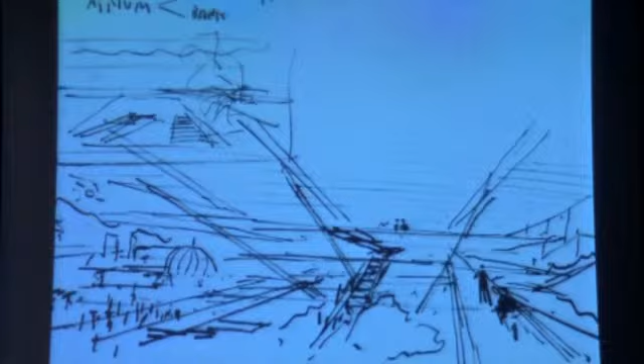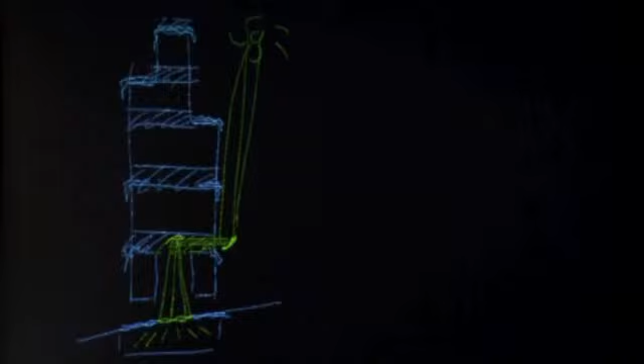It floats above. If you look at some of the early sketches here where I was indicating the possibility of gliding upwards through a kind of glass underbelly to the banking hall so that the ground would be free for pedestrians. This is an early diagram showing how that building is lifted up and sunlight is reflected down onto the space below. And this is the glass underbelly of the banking hall.

What is interesting is that every Sunday, if you looked through that glass floor onto the public space below, this is what you would see: an extraordinary colonization. This space is taken over by the Philippine community, by the ladies who serve the families in Hong Kong, who are highly articulate, intelligent. They're mostly university graduates. They move to Hong Kong because the standard of living is higher and they can send their savings back to the families in the Philippines.

And every Sunday, they celebrate, in a way, their national identity. What is interesting is there is a kind of self-ordering here, the sort of ordering that you will find in a favela, so that when a favela is eventually, in some instances, transformed into a permanent settlement, then there are certain grid lines, certain geometries, certain orders. So that transformed favela doesn't look any more like a favela. There is a very interesting kind of hidden order.

And then, come Monday morning, for the remaining 6 days of the week, it is very much a civic space.

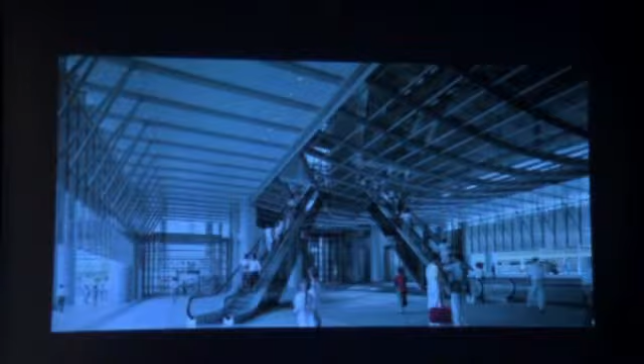If I fast forward 30 years on and look at another project across the water from that bank, in other words, if you looked out through that bank, through the windows, you would see across the water West Kowloon. And this site here, ringed, is the site for an extension of the city.

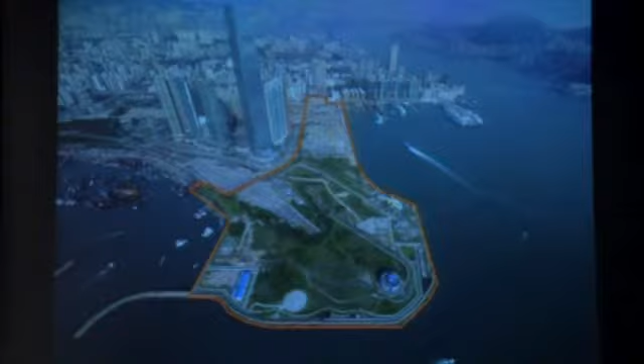This was the subject of several competitions. We competed 3 times for this project, and the 3rd time—well, we won it each time, but hopefully this will be the last competition. It's a competition for a master plan and a combination of buildings.

What was interesting, and we had great difficulty in communicating this to the jury, to the public, was that this, as a master plan, was an extension of the city. It was not about the design of individual buildings.

The reason why I concentrate on this is that I find it very, very difficult, even with my architect colleagues, to get an awareness and a sensitivity to the importance of making spaces as streets, from learning from how traditional streets, routes, boulevards, alleyways, whether they're tight, whether they're pedestrian, whether they have traffic. What is the DNA of a city, and how do you learn from that? How do you create outside spaces?

I think that the problem is that as architects, we are educated and brought up to think of the building as an individual act in itself, not locking into the wider city. I think this building, incidentally, is a brilliant way in which it engages with the city.

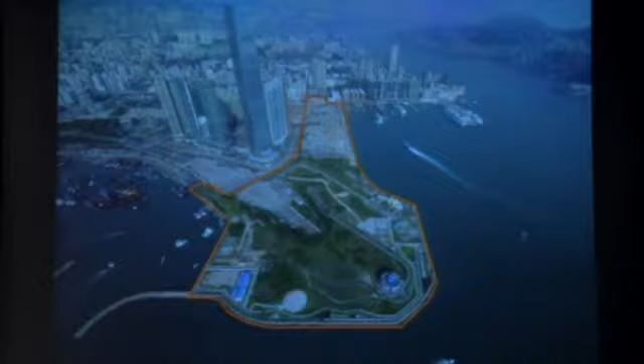It's not just an object in space. It's very much about a space-making building, but that's another subject. To come back to this, the brief was for culture. It was very much around-the-clock, a 24-hour community to be made.

What is interesting is that you see, not only in the red, a strong mix of culture as a driving force for this new extension of the city, but in our interpretation, a huge amount of open public space, whether those are paved spaces or a great park.

We went back and sought to identify what makes the key spaces, whether it's Nathan Road here, which is emblematic of Hong Kong, or whether, if you turn right or left off this street, you find a maze of narrow pedestrian alleyways. The combination of these spaces is what makes Hong Kong.

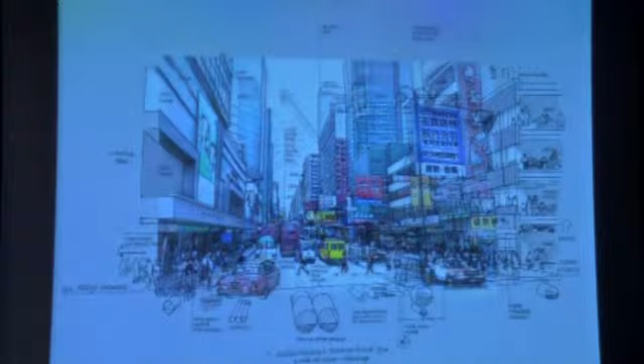Can you analyze it? Can you dissect it? We attempted to do that through research. We discovered that the layering, the way in which the shopping would go upwards, offices above that, residential above that, would be quite special to Hong Kong.

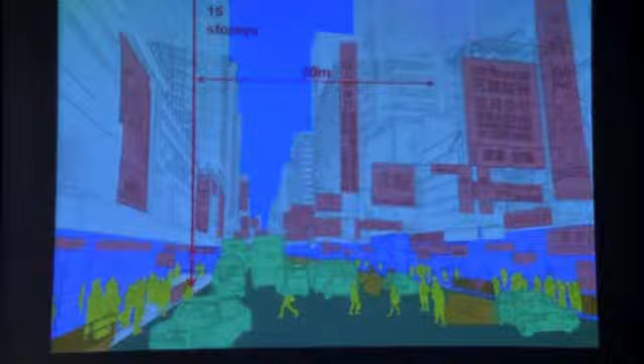And then we analyzed the visual field. What proportion of the space, when you look, is signage? Signage is a very, very vibrant aspect of that. How much of it is traffic? And how much of it is sky? How much of it is the architectural fabric?

Could you dissect that, and could you take away the thing that everybody hates about that street, and that is the pollution of the traffic, the hazards of crossing a road? Could you have all the good things, and could you address some of the more problematic things?

But there's another aspect to this project, which is its sustainability. It is zero carbon, zero waste, made possible by the research that we did on another project, which I will end with, which is Masdar.

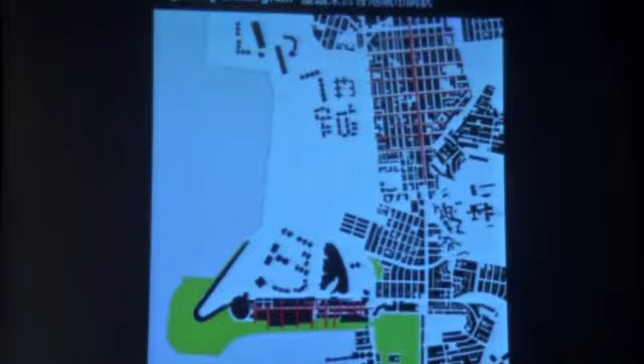If we pull back and look at it in context, here's the Nathan Road area, the big vertical line being the main road, and then off it, those little side alleys that I talked about. That is the inspiration at the bottom for the new project, the master plan.

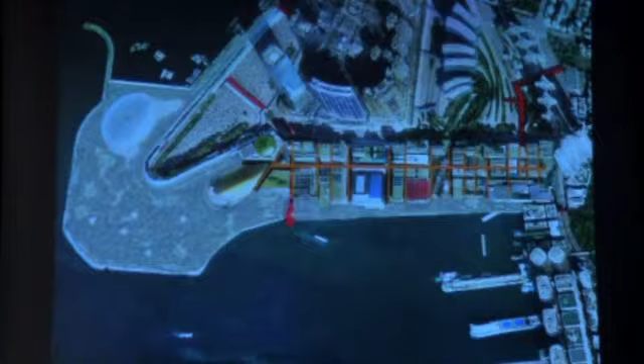Looking very much more at detail, here you can see very, very clearly the grid. You can see those buildings where the cultural elements are embedded in the fabric, and others which are more sculptural, freestanding, and they relate to this great park, a huge park.

The decision on this, and I think this is an interesting move and one that we're seeing more and more, was essentially a public decision. There were a number of exhibitions, there were voting rounds, and finally it was the public who played a major role in the selection of this scheme.

Here's some visualizations of that park. A very important contributory factor in terms of the trees, their ability to absorb carbon dioxide, bringing natural species that would be common to the area. So again, a park that would be very Hong Kong in its feel and could not be confused with a park in another city in the world.

One of the projects that was very important in the past in terms of the wider urban context was a very small competition for a project in Nîmes in the south of France. This is going back to 1985. It's coming up to its big anniversary next year in terms of when it opened to the public.

And this is the wonderful Roman temple, which was facing the site of the competition, which was occupied at that time by the ruin of a 19th century colonnade for an opera house that burnt down some years earlier.

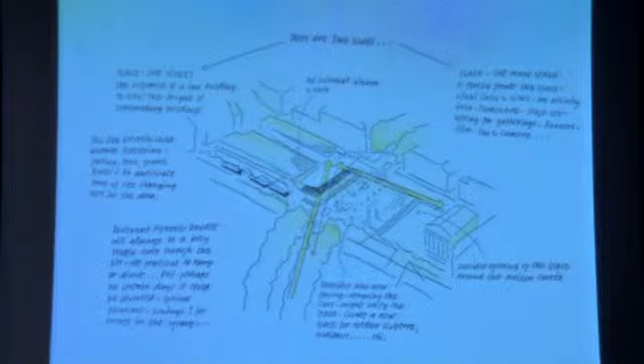This is not about a building. This is about a bigger picture. And the interesting thing is that we won the competition, and with the support of a very sympathetic mayor, we worked with the authorities, and the transformation, again, is beyond an individual building. So I draw some attention to that part of the design.

This was a photograph I took with the Roman temple behind me, all the parked cars that I'm complaining about there, the site in the back, which is a car park. The ruined colonnade has gone, and then its final transformation, when the building is realized and the square is addressed and the parking is addressed and the paving.

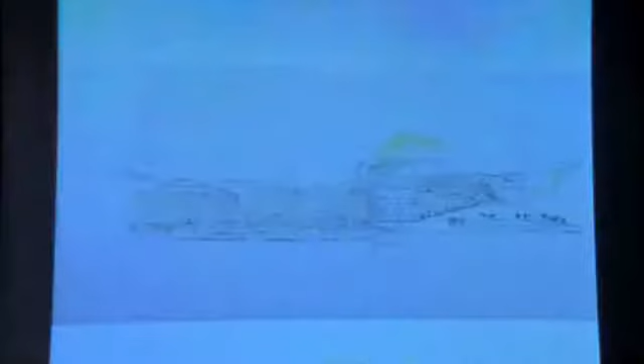Then it's very, very difficult at this point to say, what is this project? Is it about a building or is it about a space? Of course, the two now become very, very difficult to separate. They become one and the same because they are conceived as part of the same issue, the same challenge.

This was a drawing that I did during the design development of the scheme. It's not like this now, but in spirit it is. And that cutaway section shows a main route ascending as a kind of terraces within the building. Another aspect is that the public can take a direct route through the building, so it becomes a shortcut. It's a faster way to get from one side of the square into another district.

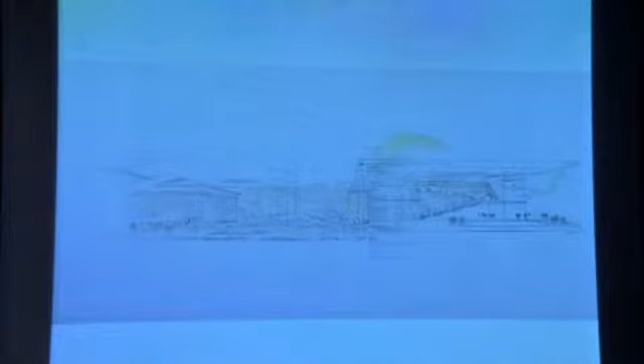So people will enter the building not just for the facilities that it offers, but because it's a quick way across that particular part of the city. The inspiration for that cascade of stairs was very much the hill towns, the terraces of the local hill towns in that area of south of France.

And that becomes translated in terms of cascading steps, which in this instance are cast glass, so that light is delivered deep into the lower part of the building. This building in its urban response is the same height as the surrounding buildings, which means that there is as much accommodation below ground as above. So getting natural light deep down is very, very much a part of that.

On the way up, there are galleries which serve an international audience. They also cater to the needs of a local community. But always when you finally surface on what is not the roof, but the level just below the roof, under the shading, again, is the engagement with the city, the engagement with the historic square, the monument, the dialogue between the old and the new, and creating a space which is about celebration, is a kind of stage set for civic entertainment and celebration.

If I move to another building, which in turn is a kind of cultural generator of regeneration, this is something called the Sage. And this is, unlike Nîmes, which is very much about the visual arts, and that concept, very special to France, of a mediathèque, which is about the archiving of what is special to that community, in that case very much about bullfighting. This is about music, and this kind of great umbrella of a roof

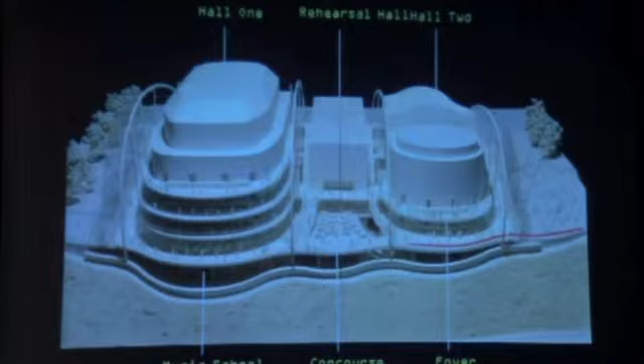But the important thing about this building is that it locks onto the street pattern. It creates, in effect, a new street. That red line follows a river bank. It's an important artery. So again, people may take that route because they want to use the facilities that the building offers, but also they can take it as a shortcut, and they can use the cafe, and they can then, through curiosity, maybe engage with the cultural facilities that as a building it offers.

And here, in this instance, the camera catches a kind of public parade which snakes its way through that street from one side of the city to the other. This is Gateshead on the Tyne.

Again, the generator is culture. The location could not be more different. It's Dallas, Texas, a car-borne society. And the project in question, which is right at the side of this freeway, seeks to engage the pedestrian domain.

Quite interestingly, even in the more extreme car-borne communities of America, there is a growing awareness of the importance of redressing the balance, of addressing the public domain. This project, again born out of a competition, is very much about addressing those issues of humanizing the city.

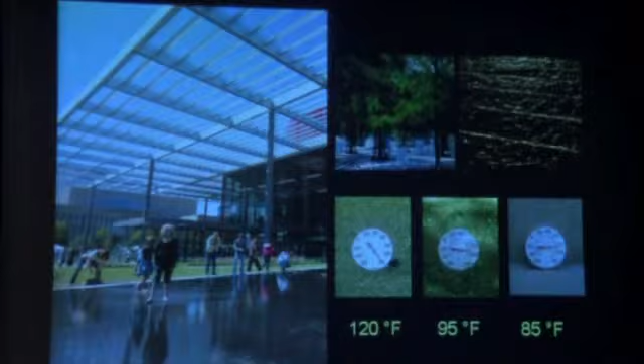Shade is very important, sometimes full shade, sometimes mottled shade. I know it's not centigrade, but 120 degrees Fahrenheit is quite hot. That drops down fairly dramatically in the dappled shade, and even more dramatically down to 85 degrees. One aspect of that is the evaporative cooling offered by the water, which offers an amenity, and at night becomes the reflecting pool for the grand operatic occasion.

If I move to another cultural project that seeks to work with the community of which it is a part and tries to play a role in its regeneration, as well as creating a kind of common ground within that will attract the public into the museum, even if they have no desire to visit exhibitions, shows or galleries. The likelihood is that being brought inside, they will perhaps be introduced to new experiences, a new world.

At the point we started this project, which goes back in time, the whole balance of this museum—it is the MFA, the Museum of Fine Arts in Boston—and at that point there had been, in the previous 20 years, a relatively recent western extension.

Here you can see the red arrows—so that was the entrance. There was another entrance on the axis, but the main historic entrance was to the western extension, which in our view was completely throwing off the original master plan, which was very much about a major north-south axis and a minor east-west axis.

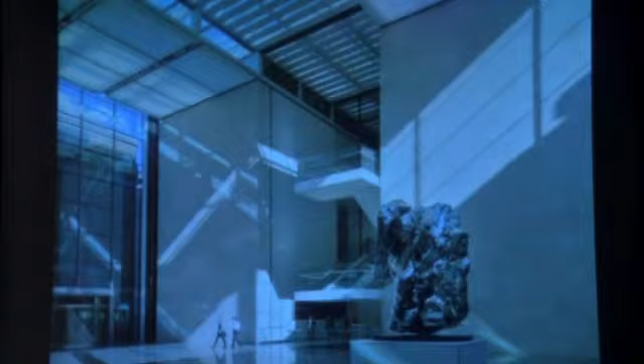The act of creating this social focus in the heart of the building—here we see this great glass pavilion—was part of the project, along with creating something like 55 new galleries, a new wing. But I'm not trying to explain the design, I'm trying to focus on the civic aspects of it.

This was the entrance opposite the Olmsted Park. So the initiative here, as an essentially private-public initiative—because the museum is driven by private funds—made possible a partnership with the city to transform this area. So a very interesting interaction between the building and the spaces surrounding it.

Another project I'd like to touch on, for its public space aspect, the common ground, is the Reichstag. The space in front of it had always been symbolically important since the fall of Berlin. This was an international competition, and that's what the building looked like at the time we took on the assignment, having won the competition.

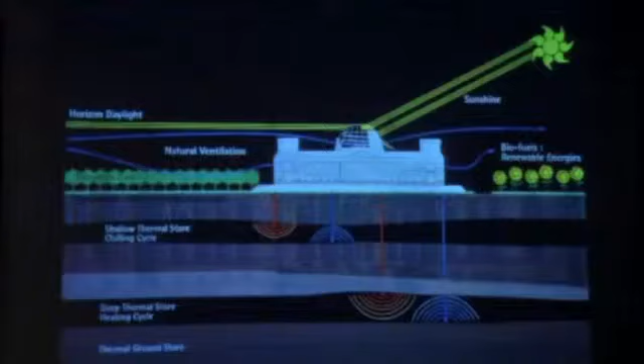I selected this diagram because it explains how this is an energy manifesto. In terms of scarcity, it's about doing more with less, cutting free of fossil fuels, using biomass fuel created by vegetable oil, using aquifers deep underneath the building as a thermal source to store heat in summer and recover it in winter, photovoltaics, natural ventilation, and a reflector that pushes light deep into the heart of the building.

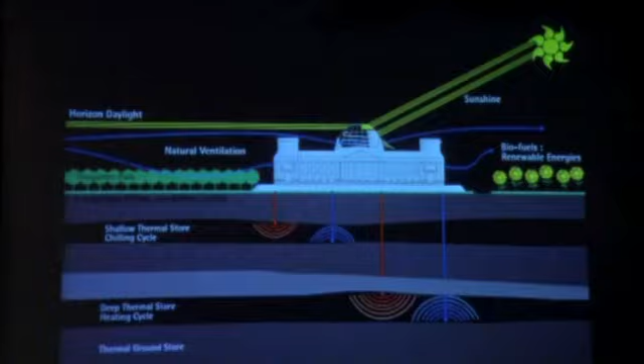It becomes symbolic of the democratic process in action. It's become very much a symbol of a unified Germany, which was the object of the competition—the moving of the parliament from Bonn to a parliament that would respect the amalgamation of the East into the West into one entity. But it's also become symbolic not just of that, but of Berlin, and of Germany as a nation.

It is essentially an ecological device, but it's very much about a public space interacting with the body politic. All of these elements—whether it's a public space on top of the Reichstag, engaging with the city of Boston, or creating public space in Hong Kong—whatever these bonuses are, they were never part of the instructions to the architect. Nobody asked for them. It was we as designers, working with those who'd commissioned us and with the cities, who added that dimension. That's a very important point.

Nobody was saying, hey, we want you to do a public space on top of the Reichstag. Quite the reverse. I remember a meeting with 65 representatives of the political parties saying, 'Mr. Foster, why would anybody want to go on the roof of the Reichstag? Why would they want to take a coffee there?' Of course, the process eventually led to acceptance of those ideas and a restaurant. The only problem was the restaurant became so popular we were criticized for making it too small for the capacity needed. But that's a nice kind of problem to have.

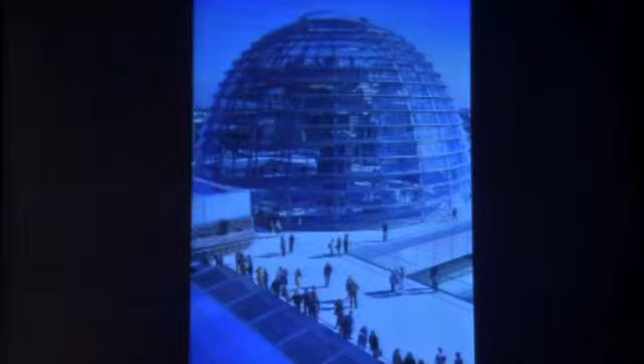So 35 million people have visited since—here's the restaurant in question, the most overbooked restaurant in Germany. This is the roof space, and this is the great spiral that ascends to the viewing platform. Through the glass floor there, it affords a glimpse of the body politic, the debating chamber, symbolically placing the public, the society served by the politicians, above them. This cone mirror is the great reflector that pushes the light down, and it's also the device that creates the wind tunnel effect, the aerodynamic effect that pulls air through the building and reduces the energy load.

Still on the subject of the power of a cultural institution to go beyond the needs of its collection and offer something to the city of which it is a part—something that gives back to the city, eases congestion through the galleries. Before we got engaged with this project, if you wanted to visit a gallery, you had to push your way through one gallery to get to the next, and the next. The solution was to go in, find a central space, and access each of the individual galleries in a very civilized way.

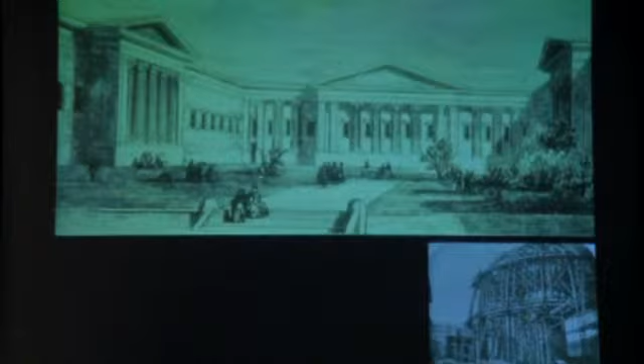The clues for us in terms of the future were, as always, to go back into the past. I think somebody said if you want to look far into the future, look far back. Looking far back here was very much about the central space—you can see the great dome of the library, the very famous library, which relocated itself to another site, and that was one of the generators of the competition. Interestingly, if you research backwards, when the building was first built there was no library there—it was a courtyard, a garden. In the bottom right, you can see that when the architect retired shortly afterwards, his brother conceived the library that would fill that space, and secondary structures then infilled between the circular library, which never had a facade.

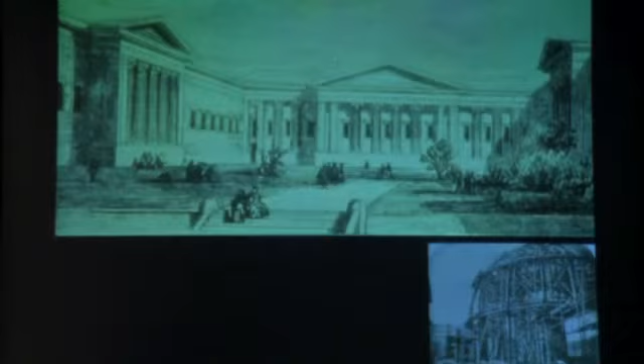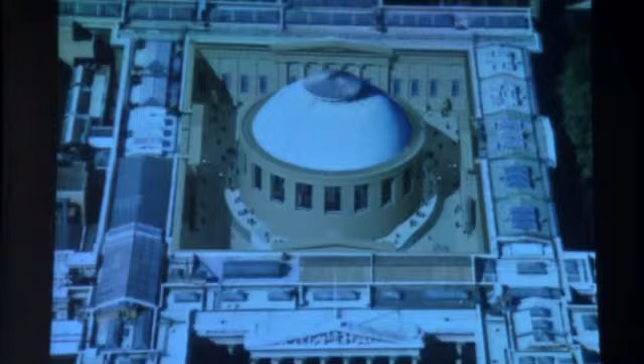It was always buried. Here you can see that except at the top where the windows are, there's no facade, it's completely filled up. So our quest, our solution, was really to bring back the historic garden within which that library sits, and the idea then that instead of having to push and force your way through one gallery to get to the next, you could enter this great space and choose to go into any gallery.

But, and this is a very big but, the idea was that this was a space that would be available to the city out of museum hours, or tailored with special opening hours in the evening for special events, and it would be an urban shortcut. You could walk through with no intention of going to an exhibition, walk in, walk out the other side. It's a shorter, more pleasant walk.

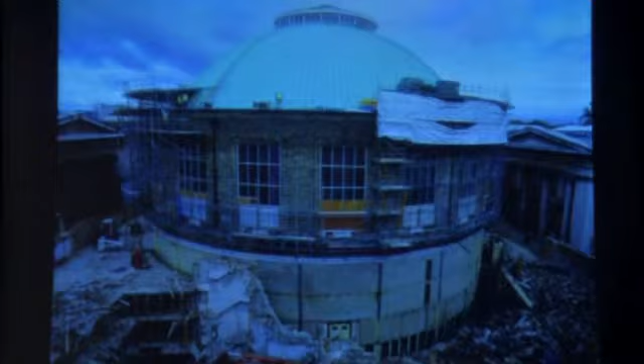And then the idea of putting a great glass roof over that so it was able to work over the year. The logistical challenges were quite considerable because something like 6 million visitors a year, and we could not close this institution. So we had to work from below and over on the roof.

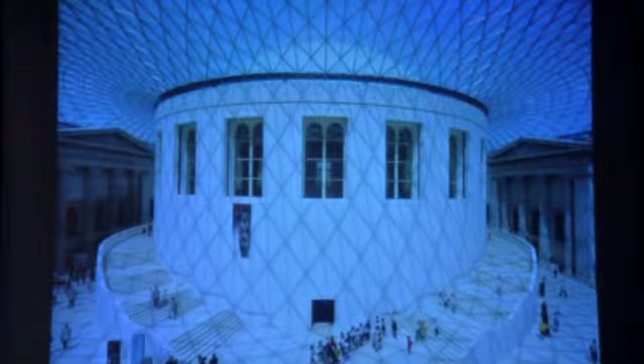Here you can see that excavation, and from the same viewpoint, its transformation. If I take another viewpoint, before that took place, here are the kind of little buildings that had grown up over time. Take those away, and again, that is what you find.

And then the celebration, the great events that can take place in that space, sometimes related, but many, many times totally unrelated to the institution, to the museum.

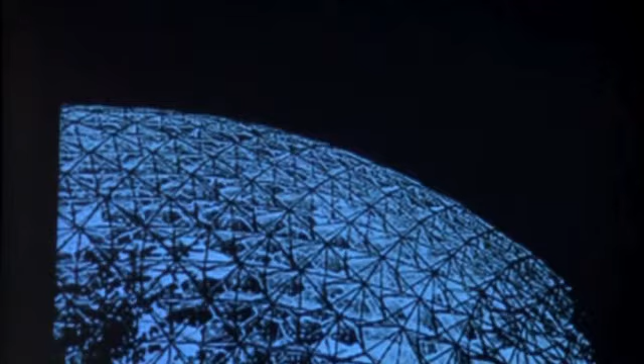The glass roof that makes it possible is very much in the spirit of one of the individuals from whom I was privileged to learn so much, Buckminster Fuller. A typical Fuller structure, with all the maxims very, very relevant in terms of today's present austerity, future needs in terms of finite resources.

How do you do more with less? Bucky, ever the optimist, always demonstrating the benign power of technology to be able to deliver higher standards of living with less and less material means.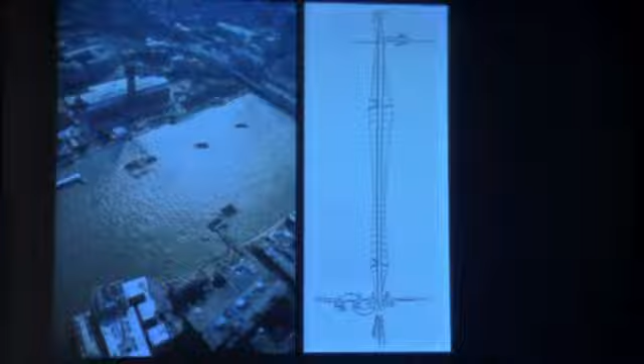Criticized at the time because it dared to be on the axis of St. Paul's, but logically, if you're going to make a river crossing, surely you're going to make the shortest crossing at right angles. And why not conceive that as celebrating the cathedral and very much on axis.

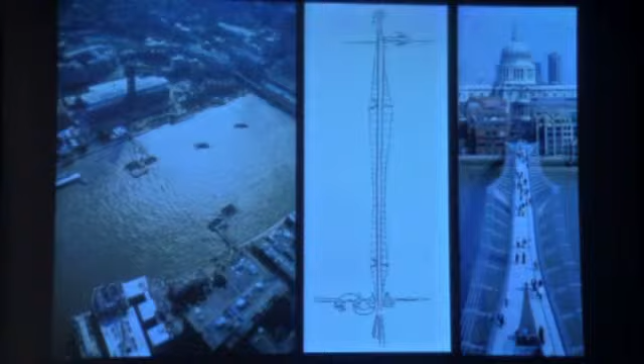So here you can see that there's a very interesting tool in terms of being able to monitor the effect of social change in terms of movement, ease of movement, convenience, shortcuts, short routes, and that's called space syntax.

It's something that, as a research tool, we've played a large part in developing, working with a group, originally embedded in a university.

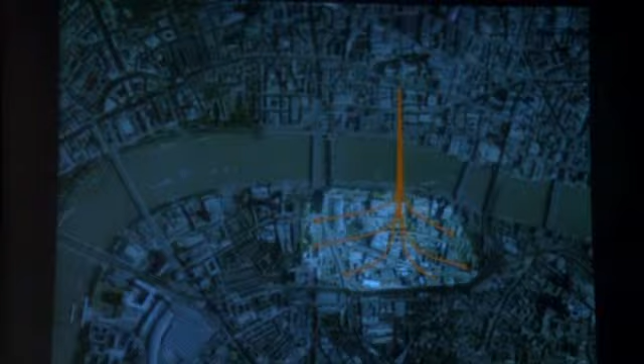To what has always been traditionally the poorer areas on the south bank. The south bank was always the areas where the bordellos were, interestingly also Shakespearean, the Globe Theatre, which is next to the Tate, which is on that side.

So this, as a connection, has brought a tremendous amount of prosperity to a relatively poor quarter of London, totally transformed it beyond everybody's expectations.

Here you can see the way in which the crowds move towards the Tate, and here the axis, as I described, on St. Paul's.

Perhaps we've been privileged to do a number of projects as architects in London, and I'm frequently asked, what are your favorite projects?

I try to turn that question around and ask, what do I think are the two most significant projects? I think the two most significant projects are not buildings. They're about public space. One is Trafalgar Square, and I think that's a major transformer. The other, in a lesser sense, is the bridge, but every bit as important. So interestingly, as an architect, I choose the two projects which don't involve buildings.

Moving to Trafalgar Square, just noting that the interesting thing about this bridge is that when you are at mid-span, you have an incredible perspective of the river, something you cannot get from any other bridge in London, unless you're fortunate enough to look out of a passing train on one of the railway bridges.

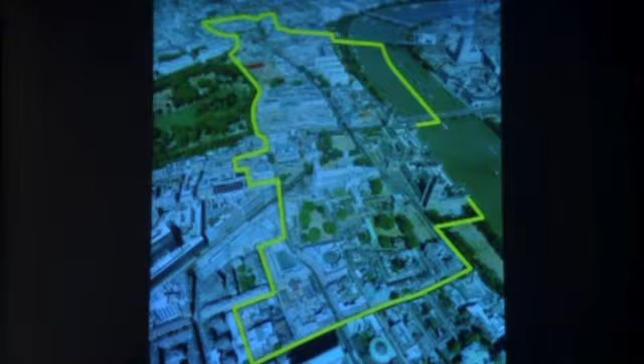This is the area that includes Trafalgar Square. Again, it was a competition. And here is the kind of yin-yang, the challenges, the conflicts. It's about improving access, which is against the issues of security. It's about addressing the balance between public transport and private cars, tourists and Londoners, ceremonial and everyday, and visual clutter against legibility.

So these as issues - what is interesting is that this is now quite an old project, and it's very difficult for anybody to remember how awful Trafalgar Square was at the time of the competition. The people at the bottom right, everybody would move around the outside because it was a traffic gyratory. On all four sides there was traffic, so people would never cross the square because it was so dangerous, so difficult.

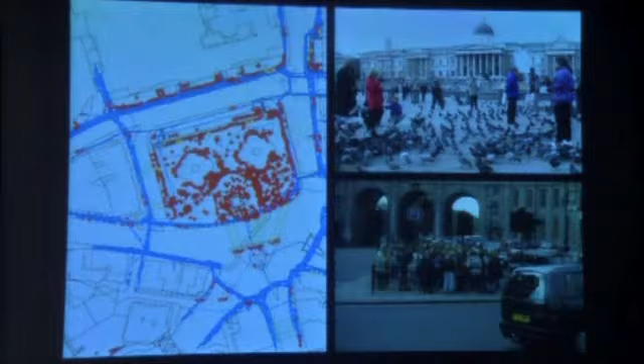And we would do computer studies trying to identify what kinds of people were in the middle and identifying the traffic flows around the edge. We learned a great deal from this research, and it told us that even doing something very small, quite modest to this space, has incredible implications on the rest of London. This involved something like observation points, nearly 170.

We questioned 27,000 drivers to find out where they were coming from, where they were going to. We consulted 180 organizations, 10,000 leaflets were distributed, there were exhibitions, and a lot of things that, how can I say, surprised everybody who'd written the brief.

Everybody assumed that most of the people there were visitors, and everybody assumed that anybody who was resident in the area would oppose change. Interestingly, 80% supported change, and there were more Londoners in that area than tourists, although a significant number of tourists.

Even to make the smallest change of closing one road and rerouting traffic, we had to do a London-wide study, again using the space syntax techniques that I've taught. Here, very clearly you can see the black line wiggling through, which is the Thames. Very quickly, the before and after.

Here you can see there is this road with all the traffic whizzing through. It was impossible to cross that, really life-threatening. And here you can see the way in which these steps have been introduced, and I'll show you a detail very shortly. There are no buildings involved - this is the minimum building interruption here. And so there is now a diagonal flow across the space.

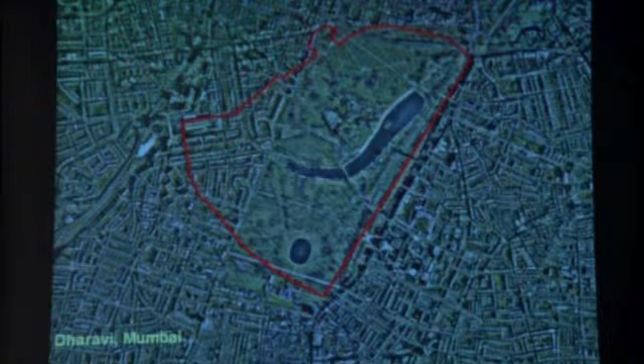Move on to a project in India, Dharavi. This image is of Hyde Park in London. And if I put that line around, that is the site of this - I suppose you would call it a favela in some societies. It's a slum area in Mumbai. If we look at that from above, it's 175 hectares, 1 million people, very high density.

We were asked to do a design study to recommend what changes, how this area might be transformed, upgraded, improved. In the process, we asked ourselves why this building, which had been built as a solution to the problems of that area, was totally...